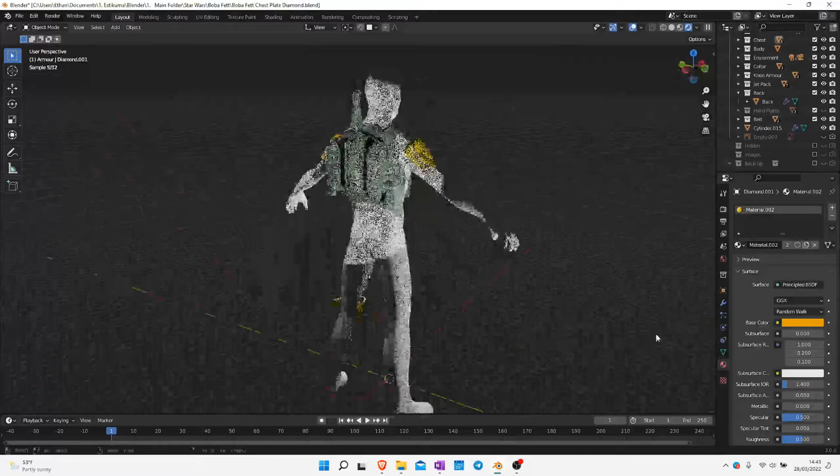Hi guys, my name is Ethan and I'm here today to help you understand if Fusion 360 is for you. If you've been following me here on YouTube, you know that I make my videos based around 3D designing, using mostly Fusion 360 and Blender 3D. Blender 3D and Fusion 360 are my two software loves in my life, and both offer a very different design experience. If you're looking for software that can generate precise designs and is easy to use, then you've come to the right spot. Let's get started.

So how long does it take to learn Fusion 360? In my personal opinion, it takes a minimum of about 6 months to learn the basic fundamentals of Fusion. However, if you were to practice a little bit of it every day, it would probably cut down the time considerably. Fusion is one of the more beginner-friendly packages that you can learn compared to other 3D softwares.

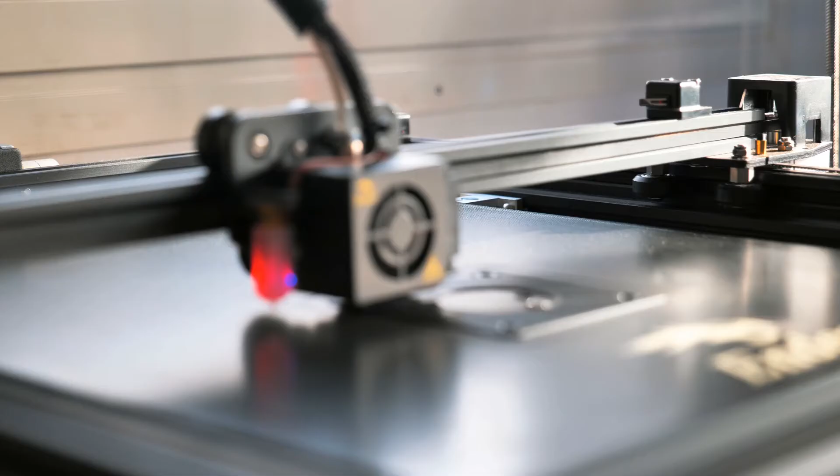To become absolutely proficient in Fusion 360, it can take up to 2 years. But this would be to master all parts of Fusion, like the design, rendering, and the machining operations within the software too. If you are looking to learn Fusion 360 for 3D printing, you will mostly only be interested in the design part and maybe the rendering for posting images to social media.

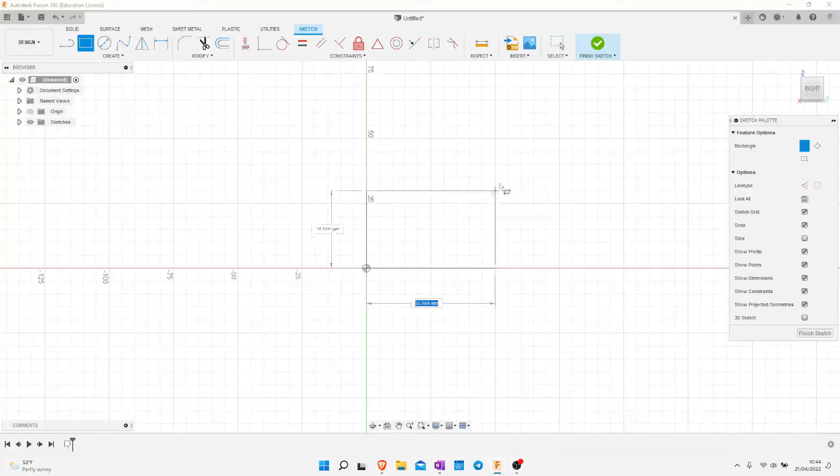I don't typically use Fusion 360's machining operations within the software because I just export my model as an STL and then put it into a 3D printing slicer like Prusa Slicer. So you will only use the parts that you need, and therefore only learn the parts that you do want to learn. So how hard is Fusion to learn?

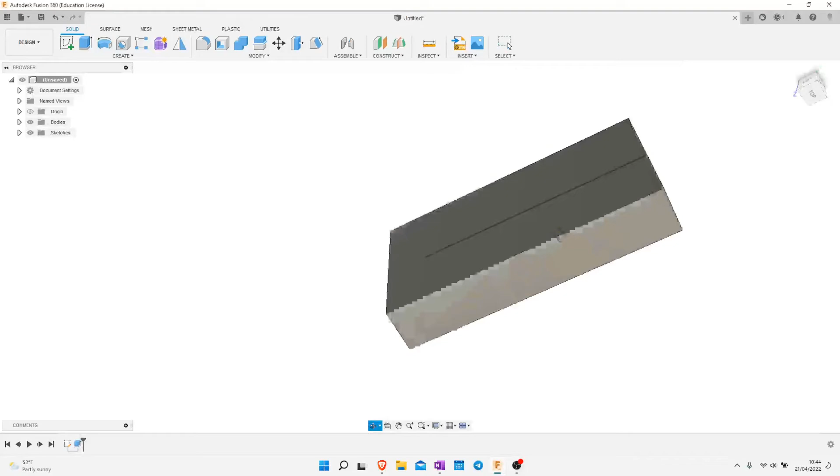I believe Fusion 360 is easier than most 3D modeling softwares. However, it can be very constrained when you are in the process of 3D modeling. It doesn't have the same freedom and creativity as other 3D packages, and you will have to go through the modeling in correct steps. Otherwise, you will just get warning messages on your screen and it won't compute.

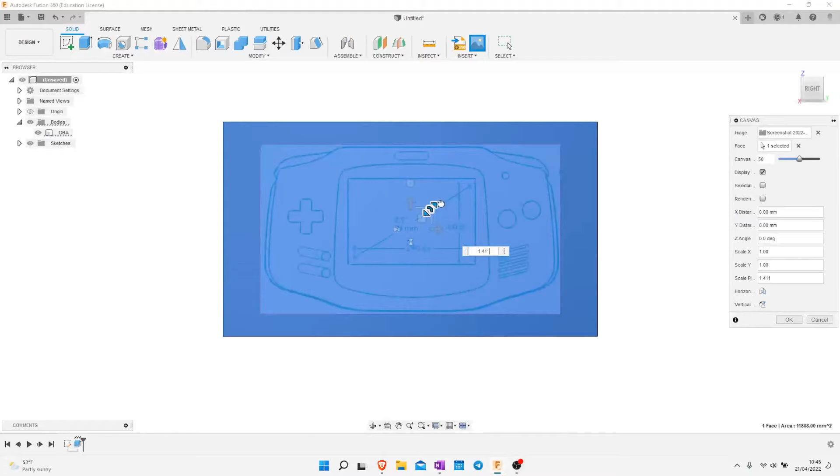So you have to do it in the correct way, and I think that is the biggest learning curve, as to what is to do in the correct process, what tools to use, what type of sketching to use in the correct way so that you get the desired output.

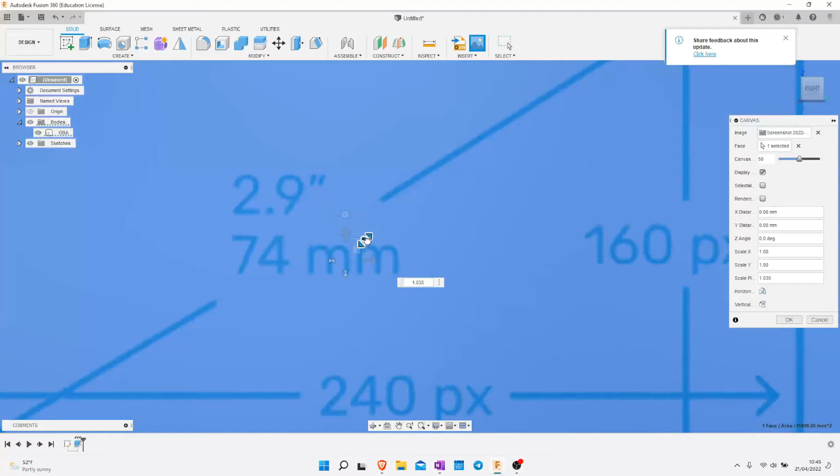You will need to understand the difference between a modeling software like Blender and a CAD-based software like Fusion. Blender offers you ultimate freedom and creativity, but isn't as precise as a CAD-based package, whereas Fusion is the opposite, offering the most amount of accuracy, but you're limited in the freedom and creativity to a point. It can be difficult to achieve the same level of creativity in Fusion like you can do in Blender, but you just need a lot more experience to do it.

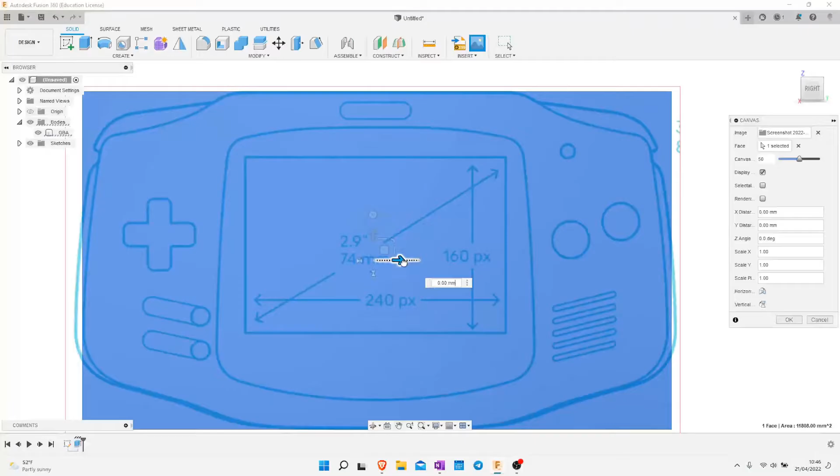Think of Fusion 360 being used for something like a Mjolnir hammer design for Thor or Captain America's shield, where the shapes are simple and easy to design, rather than something like character modeling in Blender, where you are creating characters with limbs and arms, and you have to design anatomy. So Fusion is much more for hard surface modeling.

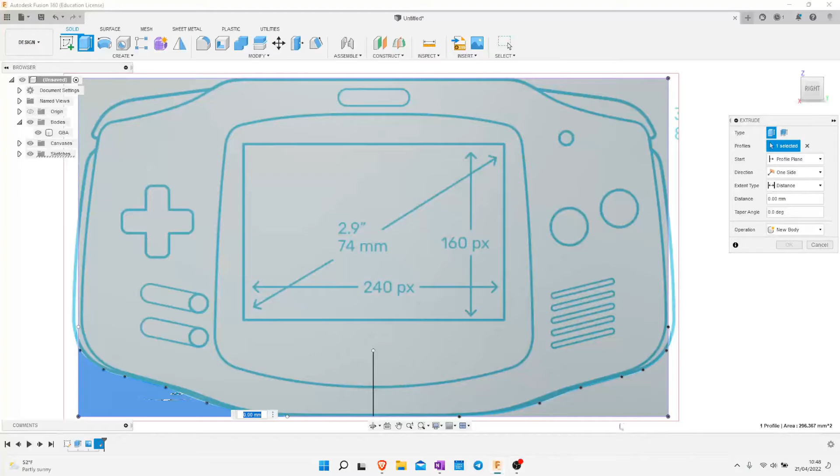So is Fusion 360 easy? As I mentioned previously, Fusion 360 has a very good user-friendly interface, which is especially good for beginners. With large drop-down menus, you can clearly and quickly find the tools you are looking for. The menus are split very well, and after a few uses, you'll be very comfortable navigating the sub-menus for further and more exciting tools to use.

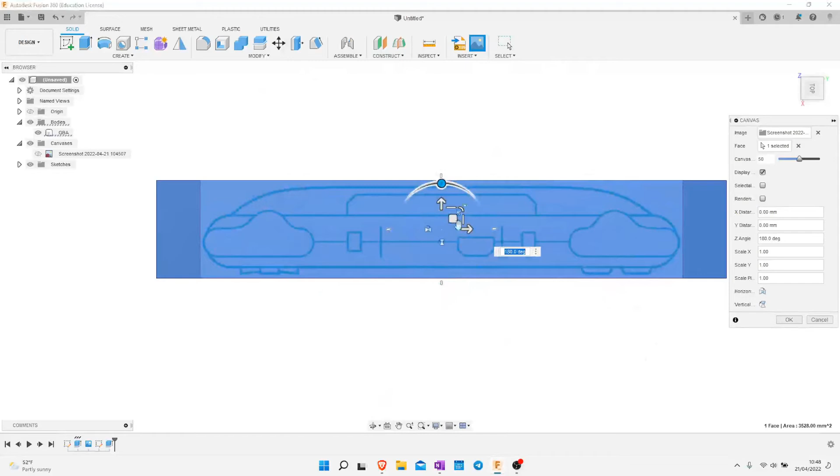Fusion 360 is simplistic and streamlined, with a smoother learning curve than other CAD design packages. I've used many different types of 3D modeling softwares in the past, from SolidWorks, AutoCAD, Inventor, Blender now as well, and Fusion 360. And I definitely think that Fusion, for being a CAD-based package, is one of the easiest that a beginner can pick up.

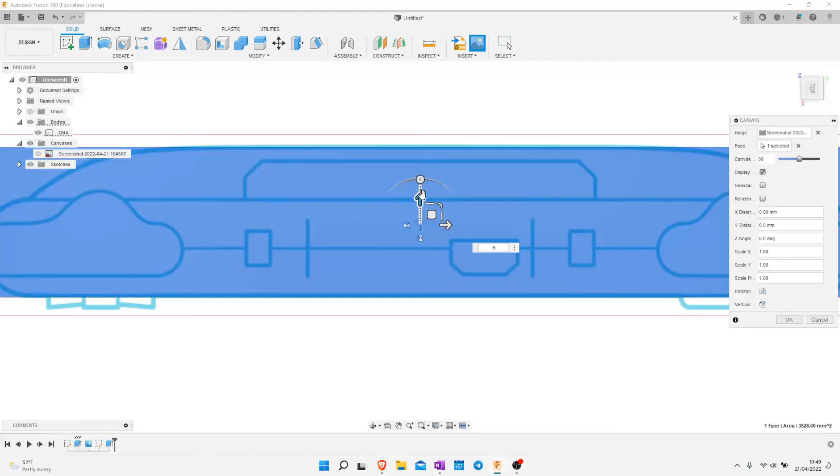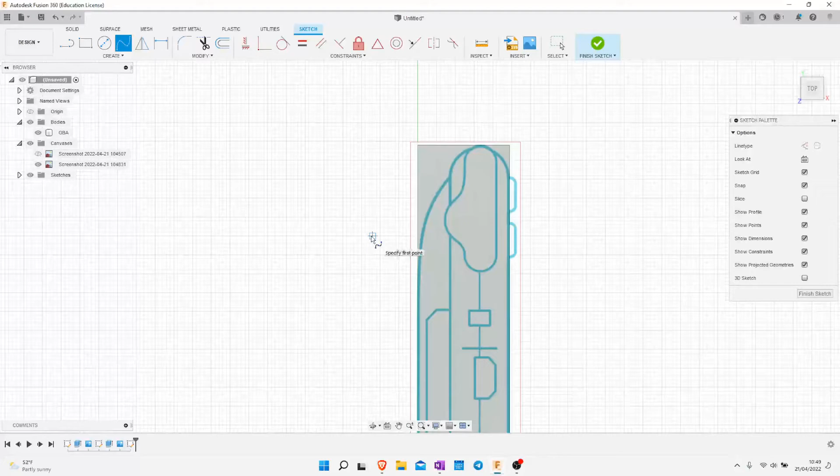The others are a bit harder to learn for a beginner because it would require you to have a CAD-based background first. Fusion 360 is technically considered to be a CAD program. You'd be based around the techniques and tools that you use. You will use the same CAD modeling techniques for starting your design in Fusion, but you will have a lot more options to turn that 2D design into a 3D model.

Fusion can be learned by anyone, but it's genuinely easier for someone with some AutoCAD experience. It will take you as a complete beginner a little longer to understand how CAD-based programs work, but once you have a few weeks under your belt, you will be absolutely fine.

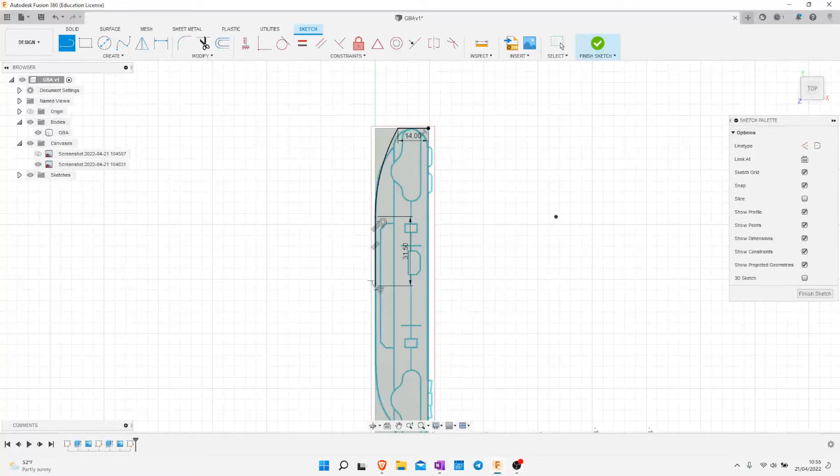So you might be wondering, how much does Fusion cost per year? This is at the time of recording, please bear this in mind if you're watching it in the future. Fusion 360 has a few different options: a monthly, an annual, a 3-year subscription, and an education license. The monthly is $60 a month, the yearly is $495, the 3-year is $1410. And usually once or twice a year they have some sales on, so 25% off the modeling software.

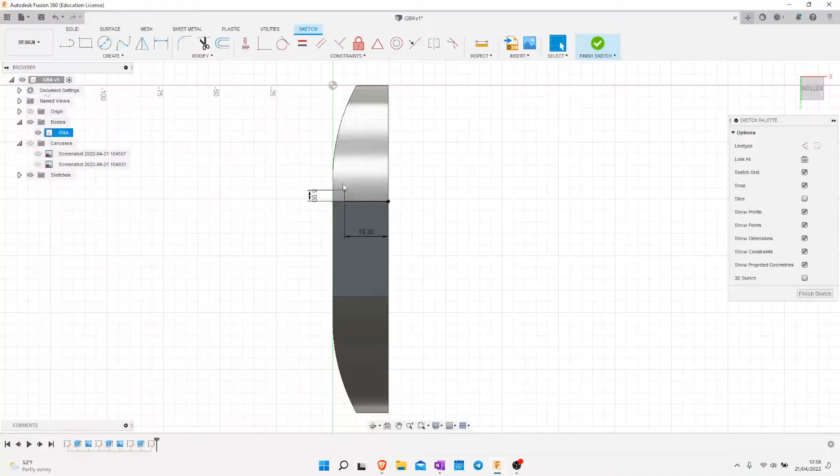Now, the education license is slightly different. Students and educators can get a free 1-year educational access to Autodesk products and services. These services are then renewable as long as you remain eligible. So if you are a student, no matter what background you have, if you're a nurse, doctor, engineer, horticulturist, you can get Fusion 360 for free for a year, as long as you are from an educational background. So if you're going to university or college, you can get access to Fusion 360 for free. I'd highly recommend getting it.

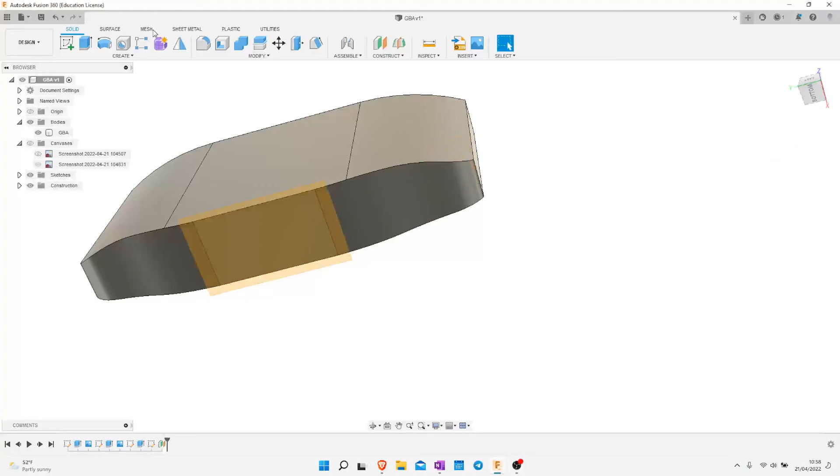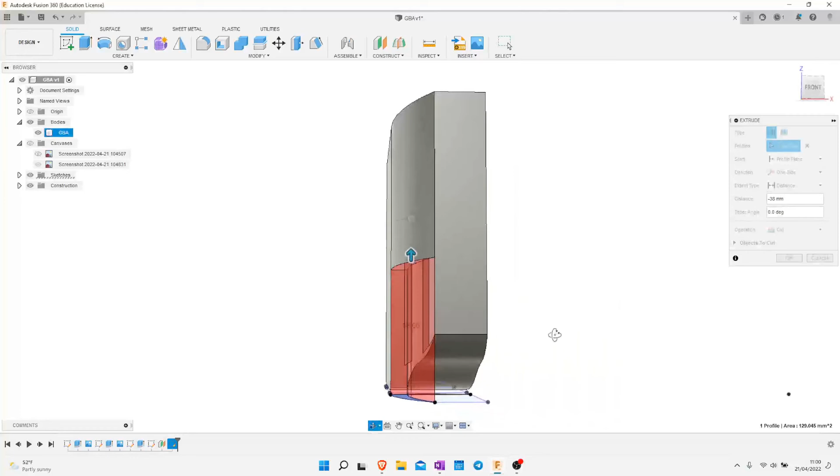Is it worth learning Fusion? Modeling with Fusion is easy, simple and fast once you've gone through the first 6 months. It can handle most design projects that you need to complete and offers you a lot in terms of modeling and design. It is an industry standard in design, so it is one of the best 3D softwares to cover your engineering needs. Other 3D packages will be similar to Fusion, so you will have a lot of the basics completed if you need to swap software packages later on.

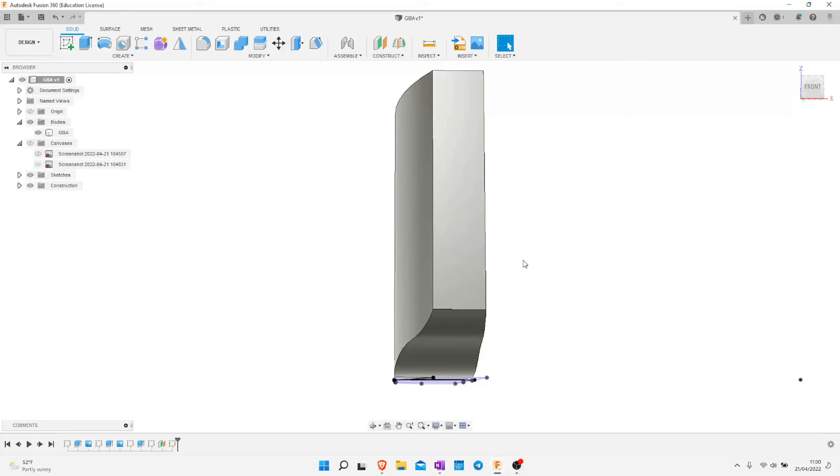By this I mean if you learn Fusion 360 for the next 6 months to a year, you will have a very good base and knowledge setup if you need to transfer to another CAD-based design package like Inventor or even SolidWorks. So is Fusion 360 hard to learn?

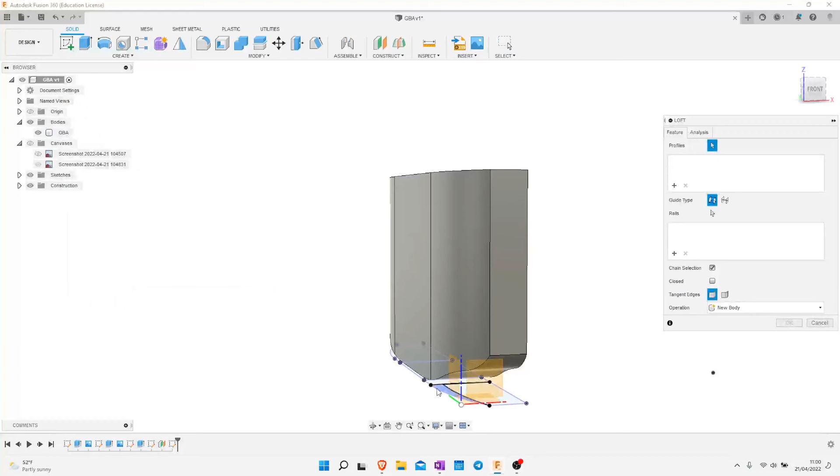I think not. Like a lot of aspects in life, it is easy to learn but harder to master. Fusion 360 is one of the more beginner-friendly design packages that you can learn compared to other CAD-based programs. As an industry standard in design, it is one of the best 3D software packages you can learn moving forward.

I've been using Fusion 360 and other 3D CAD-based packages for the last 15 years. Those packages have helped me to create some of my favorite models, and I hope they will for you too.

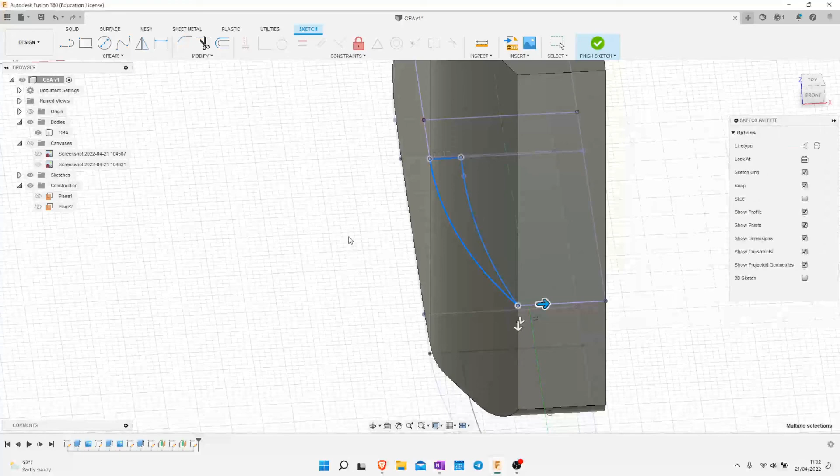If you are from an educational background, I would highly recommend going and downloading Fusion 360 and just dabbling in it. Just try modeling some squares with some holes in it, maybe any model at all. Just get started. If you start today, in 6 months you will have a very good portfolio of small projects that you can take forward and start designing something that's a lot more complicated.

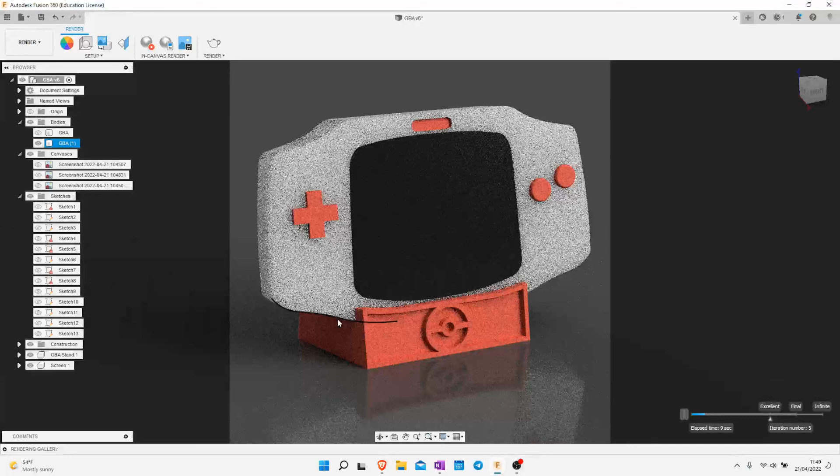And with that, I hope you've enjoyed this video. I know this is probably shorter than some of my other videos that I posted recently, but I did How Hard Is Blender last week, and it's only right that I do Fusion 360 as well.